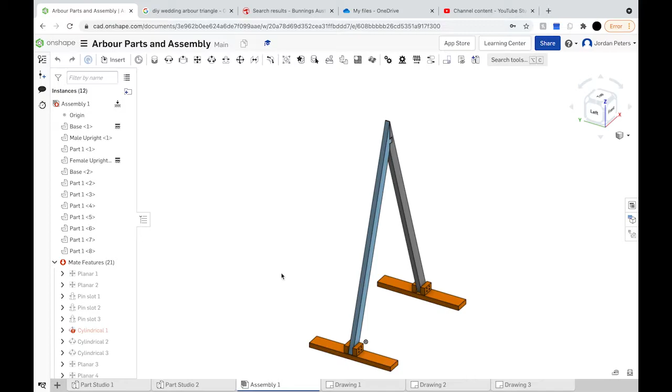Hi everyone. So this time around we're going to be looking at doing an assembly of our parts that we made in the previous video, and we'll also be looking at doing technical drawings of the assembly and the parts as well. So those can be seen in these tabs here. We'll wait for them to load.

But yeah, these are really industry standard skills that you'll need to learn how to do if you're at all interested in the industry or anything related as such. It's a really good skill to learn. I've recently used it to design a floor layout for a kind of living area. And it's really helpful, not just the drawing, but the assembly and the part studio, because it allows you to visualize things that you would otherwise have to kind of guess. And you can get really accurate dimensions and everything like that, that you just otherwise wouldn't be able to get with purely your imagination.

And sometimes drawing can be a bit misleading, while when you're getting parts and you're giving them dimensions and putting them in rooms that you've measured and things like that, it becomes really quite apparent where things sit and how far away things sit from other things. And yeah, same thing with any object. Really good to be able to model things on here. Great for 3D printing, all kinds of things. Great skill to be able to have just in general.

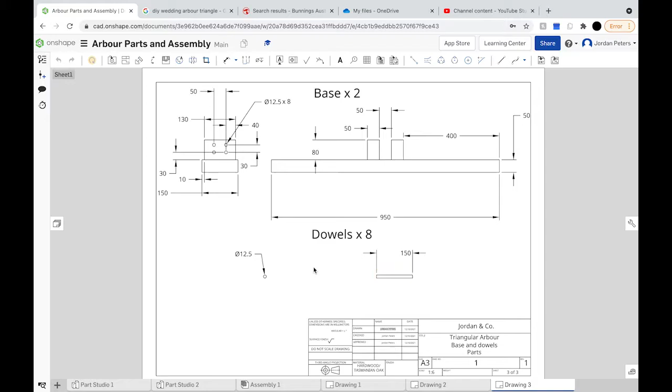Alright, so now we'll do an assembly. So we've got all our parts in our part studio, and you'll always have this default blank template that pops up, usually called Assembly 1, and that's where we'll do our assembly. So go to our front view, use the insert tool, and straight away we'll just put our base in, and then we'll right click on that one or double click in the middle of yours like mine, and we'll fix that. That's going to be our reference point for everything. And then we'll put our male upright in. Click, and click tick on that.

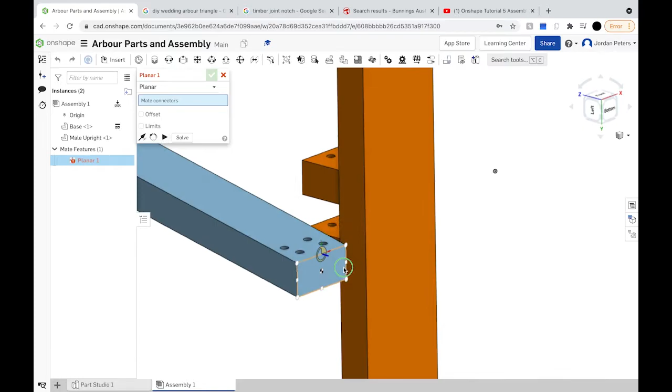And we'll do our planar mate first. So if you just come around here, select, we'll go to planar mate. So when you select a particular face, see this little bullseye thing with the green and red line and also a blue line attached to it. You're going to want that to be in the center of whatever face or hole that you're selecting to face up. So you don't want it on the corners or the edges here, we want it in the center. So that there, and then we're going to come around here and select the same thing on the other side. Alright, I'll get a better view. So that's up against there now. Alright, so tick that.

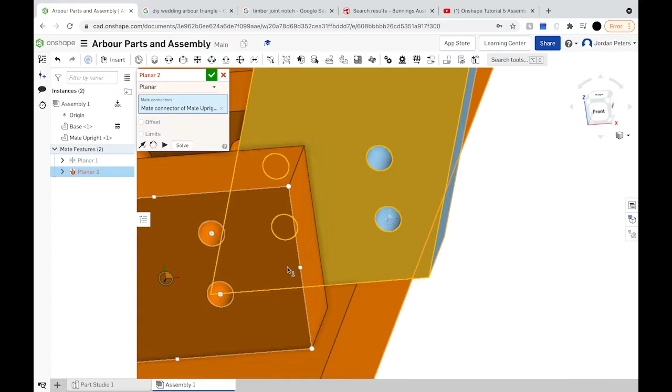And now there should still be a degree of freedom. If we grab this object, we can still move it along that axis. It's always going to remain in line with that plane. As you can see, it's just sliding in and out. But we still need to constrain it further. So we're going to zoom right in to this hole. I'm going to select that bullseye, make sure it's at the front of the hole, which that one is. Left click, and then we're going to face it up to that hole there. Alright. And then tick.

Now we'll see if you press play here, it should animate the degree of freedom. So I've pressed play and it doesn't have any degree of freedom, and when I click it and try and drag it, so there is 1 degree of freedom somehow. Yeah, so it's in line, it's facing up against that side of the hole, it's in line with that mate.

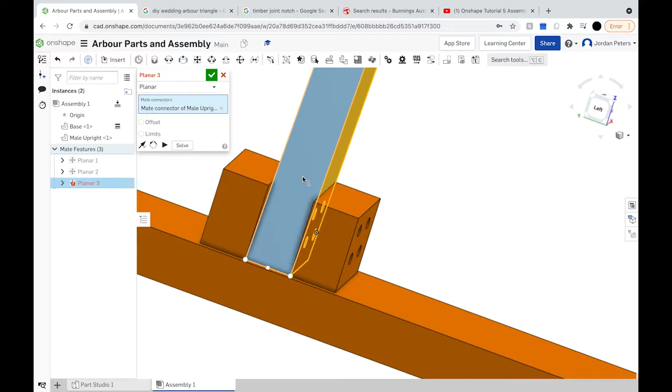We just need to constrain it so that it doesn't have the in and out kind of direction of freedom. It can't go side to side. As you can see, I'm trying to move it left to right, but it's only going in and out. So in order to restrain that further, I will use, I believe, a pin slot mate.

Let's try and do a planar mate on this edge. So selecting that there with the bullseye on the line, and then we're going to select that there with the bullseye on that line. And as you can see, it didn't really go in the right position, but I think it's just a bit glitchy when you match things up.

Where's my mic? Well, I hope you've been able to hear what I've been saying.

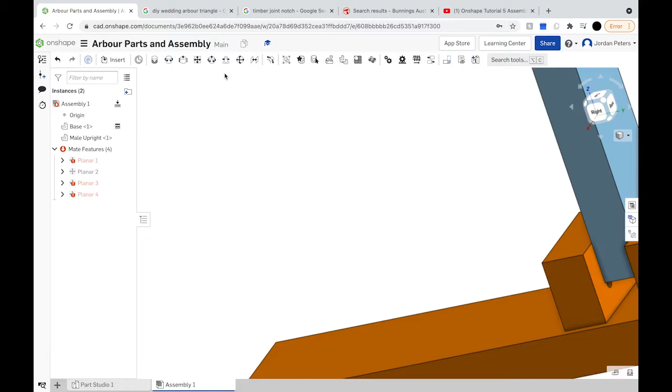But yeah, that should be alright if we press tick on that. And then also we're going to need to bring that face down to our... Oh, that might have stuffed things around actually, so I might Control Z that one. Let's try the pin slot then.

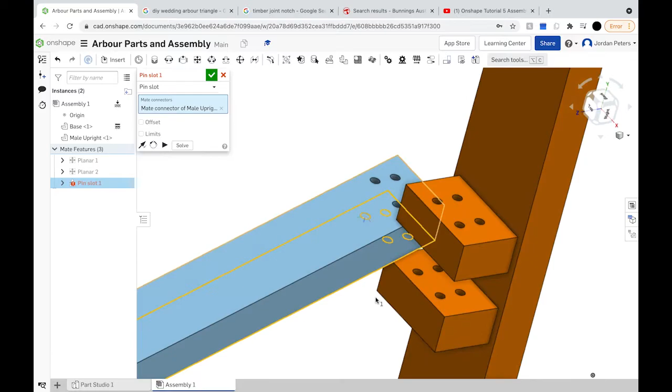Pin slot. Select the bullseye. And select that bullseye and then tick. Still has that degree of freedom. Go back. Pin slot. Select that one. Tick. Let's see what the new degree of freedom is. Still just those bits.

Then we'll go this one. And then select that one. And tick. See if it's still there. I expect it's still going to be there. So just going back to our part studio, see how things kind of matched up here.

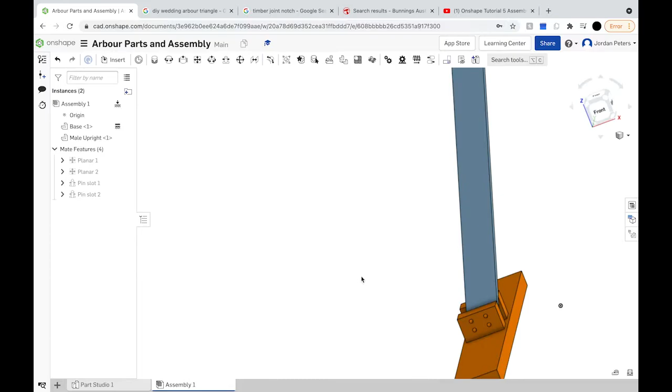Might have to create a little dowel that goes through in our part studio. I'll do that now, just quickly. So we know that the thickness of that is 150 altogether. So I'll just make a new part actually. Create part studio. So just gonna really quickly create a circle, and it was 12.5 millimeters diameter.

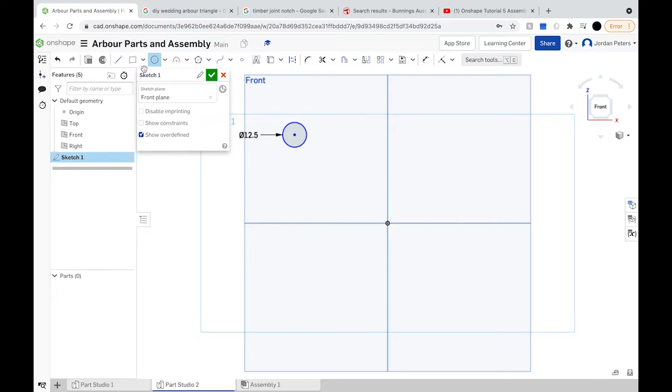And okay, extrude it, 150, sorry. And cool. Alright, that's our new part. Right, we'll try and use that as our restraining vector. So we'll insert new part, part studio 2, and there it is. Tick that, and go over to it.

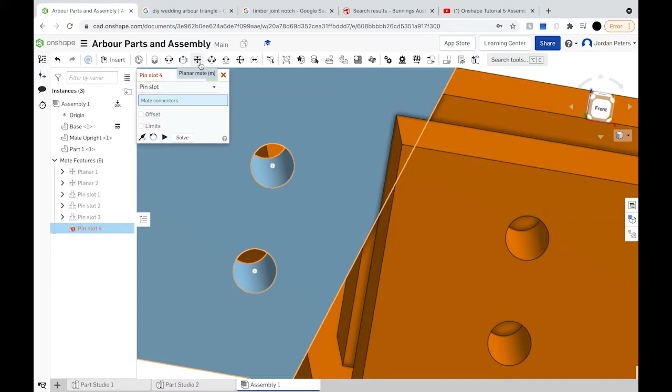Now, I'm going to go with pin slot. Go to that face, and that face there, and click OK. Now, let's see if that still has that degree of freedom. So it does. We can do the same thing. Perhaps a cylindrical mate will be better in this situation. Yeah. And then okay. Oh, still has that degree of freedom.

Like that cylinder. That there. That's solve. And then we're going to do the same thing for this hole and this hole. Solve. Okay, now that should do it. Sorry about that. There we go. No degree of freedom. Lovely. So we'll just do one for now, and we'll do the other parts.

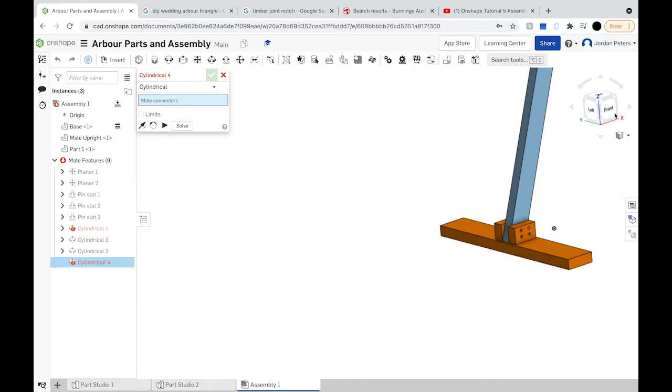Okay, now we can click X on that. We'll see what the remaining degree of freedom is with that particular part. No degree of freedom there. No degree of freedom there. No degree of freedom there. Say it has a rotational degree of freedom. Let's go to 0 degrees. 90 degrees. That's fine. It can rotate. It's not an issue for us. But yeah, we know our degrees of freedom now.

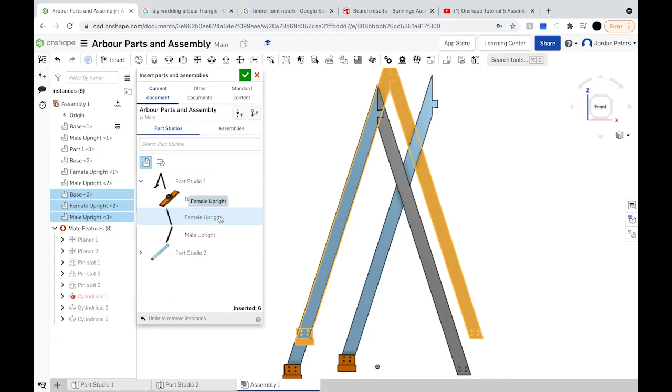Alright, now we'll insert our female part from this part studio. Oh. Go into, just Control Z those two parts. Female. There we go. Alright, now you can tick on that. Now we use our planar mate.

And we'll go that there. So we won't go that there. We'll go, X that one. We'll go this one here and here. That there. So bullseye's on that middle of that face. And then we'll go to that face there. And tick that. Now it should still have a degree of freedom to it. That's alright.

Let's try this corner. That corner. And solve. Now let's see if we have a degree of freedom there. Yeah, I still have that degree of freedom.

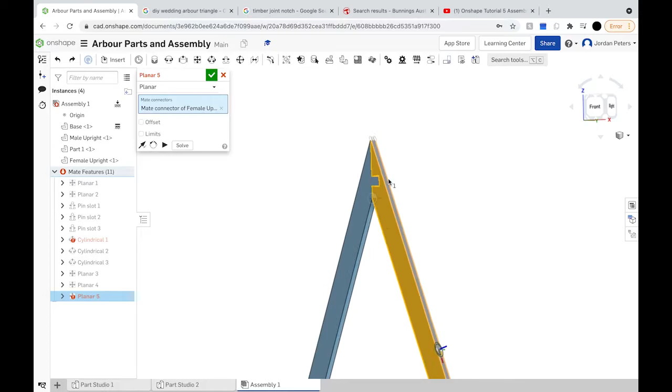Might just have to fix it there because we know it's perfectly kind of up against that part. Go right and zoom right in. Yeah, it's in line and everything. So I might just have to fix it where it is. Not really sure how to get around it. So okay, left click on that object and click fix. So now it doesn't have a degree of freedom.

Alright, now we're going to do the same thing with this one on that side. So insert, down arrow instead of clicking on the whole thing, and a new base. Planar mate that part. Zoom right in, make sure you're grabbing the right one. And then that face there. And then tick. And then we'll move this bit out. And we'll use our pin slot to insert.

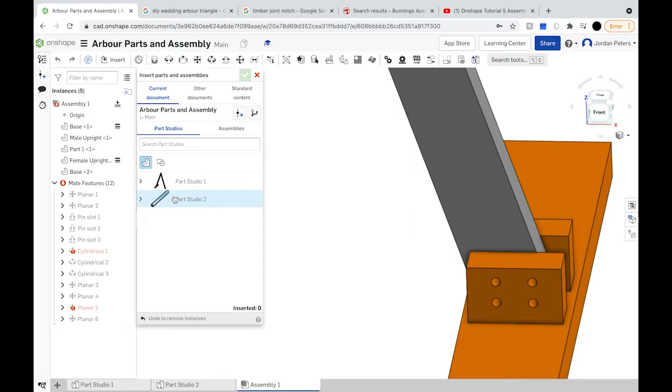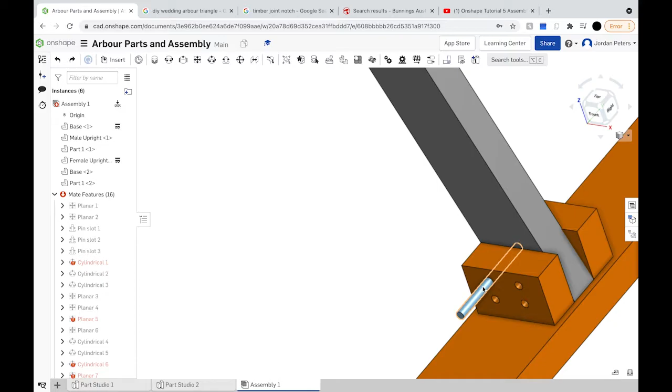We will use our cylindrical mate on that. Okay. And then the same thing for the other hole. Make sure we get the right one. Okay. And just putting that face as a planar mate up against that face. Solve that. Oh, didn't quite work. I think we've centered it accidentally. So wrong face we used. Alright, now cylindrical mate up against that face there. Solve. Lovely. Alright, now we can see what our degree of freedom is. Anything.

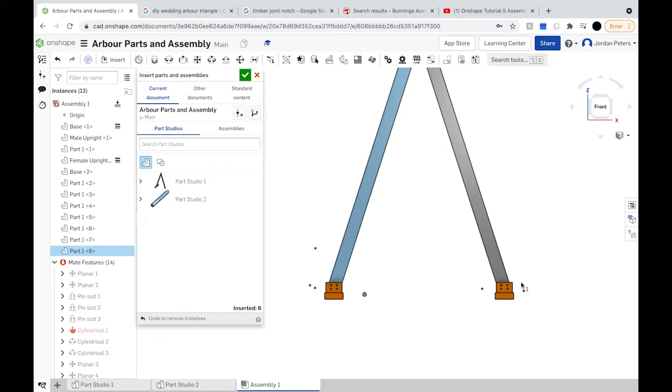Alright, so that's our assembly done. Cool. We could probably put some more of the rods in. We'll just do that. I might just leave it. It's not really necessary unless I was to put this into a drawing, which I will actually. Alright, we'll go through and do that. Go through the effort. Insert. We want another 6 of those rods. So 1, 2, 3, 1, 2, 3. Alright, tick. And I'll go through.

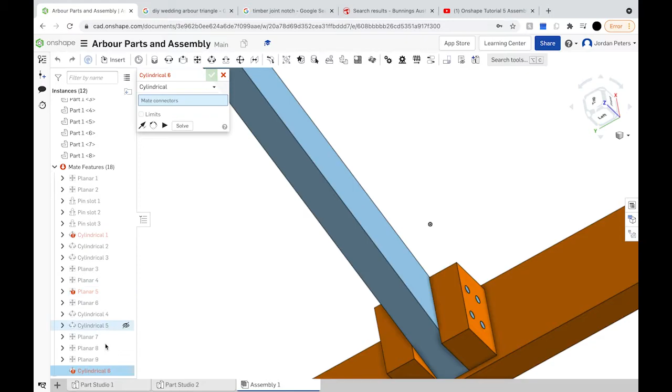Go planar mate. Select 2 holes, tick. Planar mate, hole, tick. Planar mate, hole, tick. Hide our male upright. Oh, what happened there? Yep. And select our cylindrical mate. Oh, wrong one. And hide our male. Select our cylinder. That, and then show our male and hide our base. And select that face. And tick. And then show our base again. And then repeat that process, but as long as it's in there, it's not really necessary.

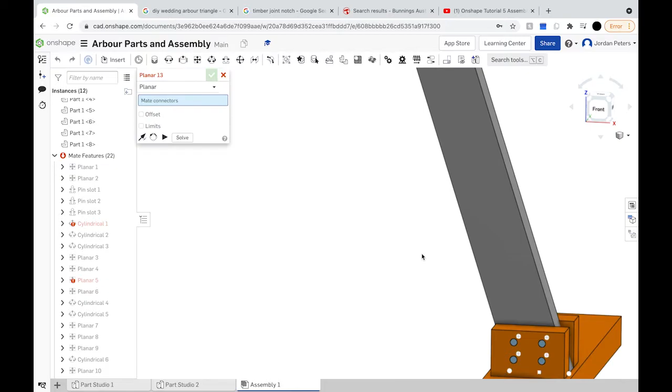So planar mate, that, solve, that, good, and that, done. Alright, now we have our whole assembly done. Okay, the next thing we can do is put it all in a drawing. So click out of that, show that, and we'll make it a drawing. And there's default ones in here. I think the one I just choose at the moment is ANSI B millimeters, or I may have opened one. No. So have I recently opened one? No, it's still on public.

So an A3, go Onshape maybe. Alright, A3, go ISO, try this one. Okay. And we can put our assembly in. Scale can be 1 to 30, 1 to 20. 1 to 20, there we go. We'll do a front view. Side view. And an isometric. And I'll just move these around down here.

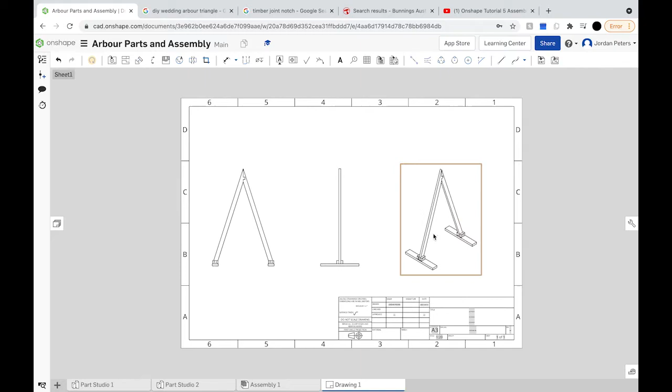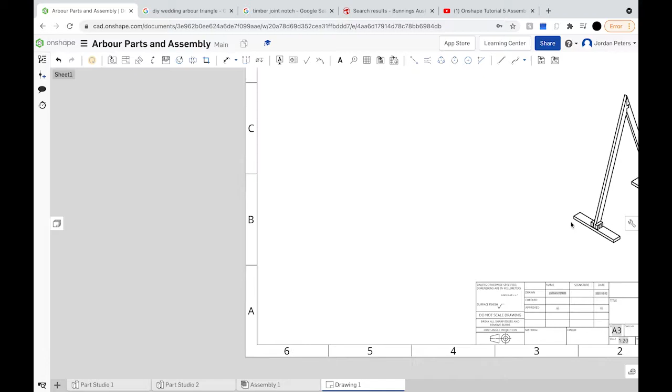And we'll put in some critical dimensions. Almost want it a bit bigger, don't we? Try change our scale to 10. A bit too big. 1 to 15 maybe. 16. Get out of that. Select our previous ones. Might have to delete the initials. Alright. So view 1 to 16 is what we're going with. Front view. So assembly 1. A front view. Side view. And an isometric.

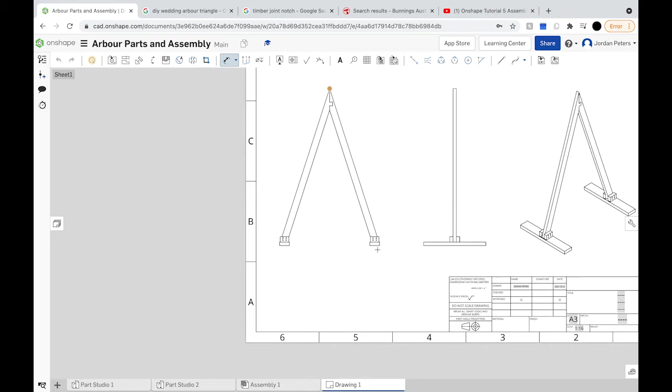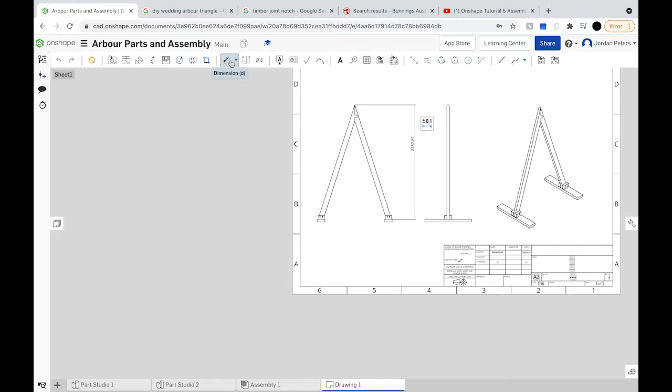Alright, now let's put in some critical dimensions. There we go. From here, so left click on the top point to the bottom corner. And now we want that to be a different type. Maybe I have to go back on that one. I was more thinking of a different dimension. Go that top bit. This bit here. It's the same. Trying to get this dimension here, which is probably all I need to do is this, isn't it? There we go. It's not a round number, but that's okay.

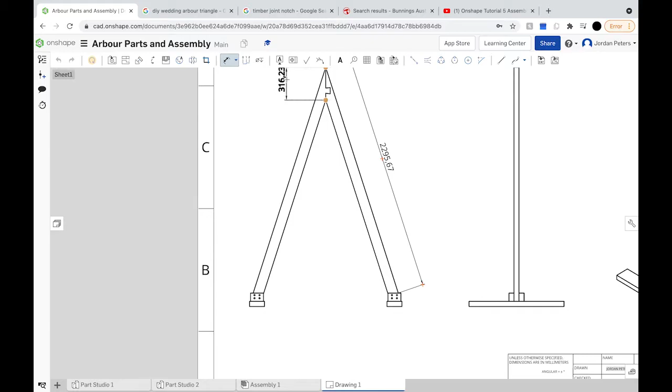This part. There's a few non-round numbers, is there? 16. 60. And then 50. And then that dimension there. And that dimension there. Put it. And that means we'll just have to move a few of the dimensions out. Move that one further. Move that one so it's in line with that one. Move that one so the 60's on this side, further out as well, and move the 200 so it's in line. And it's on the other side. There we go. And then this can come out further as well.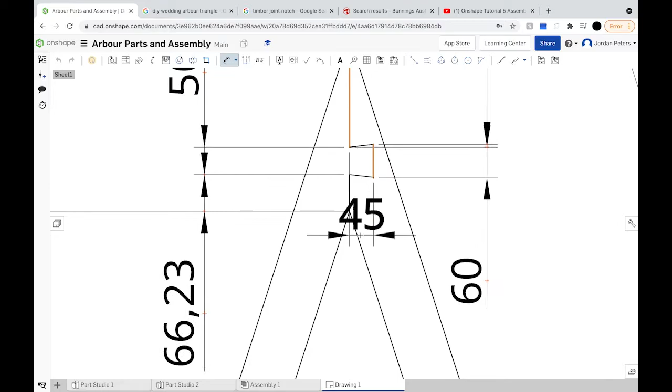Okay, so we've got some critical dimensions up here. Probably need to know that dimension there. Between those two. Lovely. 45. Can bring that out further. And then they can choose whatever angles they want. That's fine. So the critical dimensions are there for that part. We're going to have to do some on the blocks. We'll do these circles.

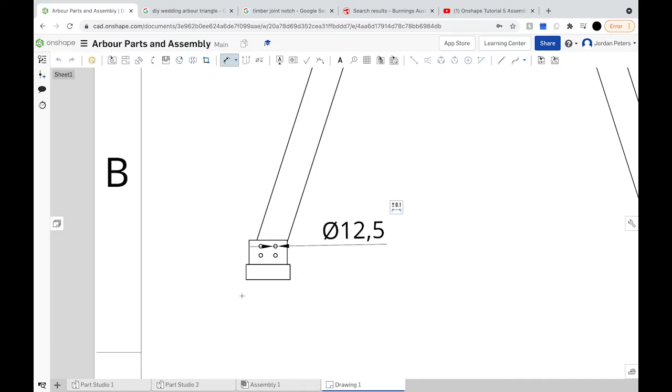There we go. 12.5. And then, when you have multiple of the same hole, you want to write times the amount of holes that you have. So we have 8 holes, so we're going to go to our note feature, and we're going to write times 8. And that's it. Simple. And we can get out of that feature now.

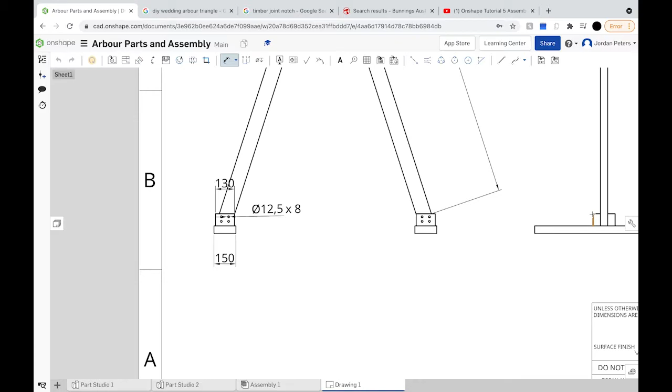We've got to put the dimension in for this bottom dimension. For the side. Oh, actually, no, we don't need to do the side height. What else do we need to do? This dimension here. And that one takes control of the height dimension of both of those.

Oh, distance in from the side. That and that. So when you do distance from a side, you left click on the face and then you left click and shift on the next face that you want to do the distance between. I don't know if I made myself clear before on that. Yeah, so 10 mil, go 10 mil either side just for good measure. 10 mil.

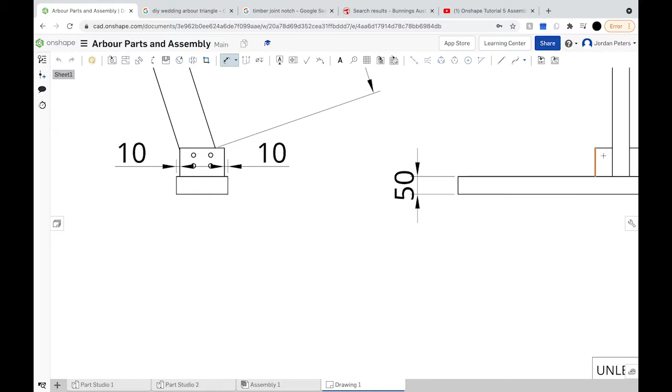And then in terms of positioning for where this sits in relation to the stand, that will all be worked out when we do the individual part dimensioning, which is good. Alright, so now let's do height dimensions on here. 50, 80, 50. And length dimension 950.

Dimension between here and here, 50. And then the dimension between here and the bottom, the top and the bottom. It's an important dimension. Again, not exact numbers, which isn't ideal, but that's what happens when you're dealing with angles and things like that. That should be all the critical dimensions for that part.

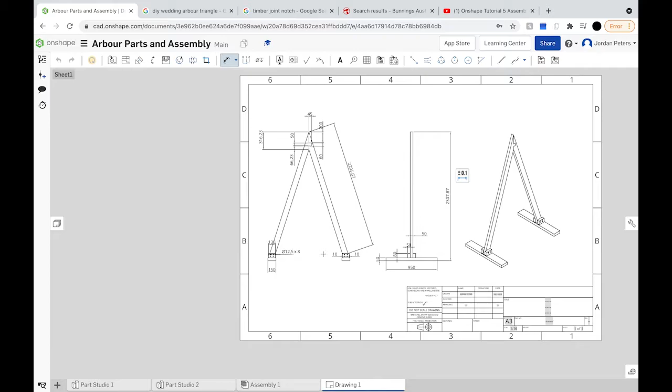Is it all clear in here? And that's probably better off over there actually, because the line, it's deceptive. It looks like it's from that joint, but it's really from this point here, which is where the 50 is. So we'll bring that over here. And we'll bring him further out. It should be alright like that. Yeah.

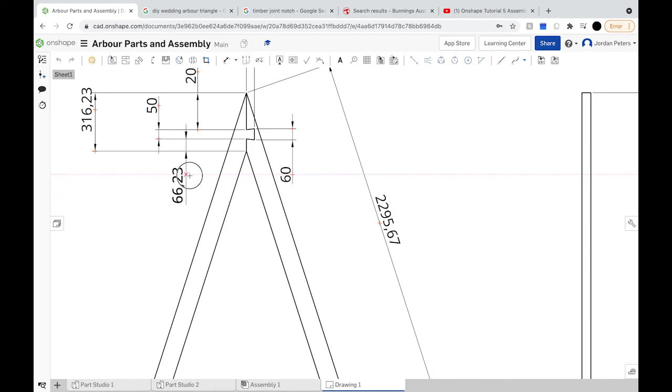Right, looks good. Right, now we'll fill in this table here. It automatically does the date, automatically puts your account name in. You can also just change it if you need, just double click on it. Checked, usually by the person you're submitting it to. You can send drafts off to whoever in industry. You send it to your boss or the client, and then approved by typically your boss.

But we'll just write Jordan Peters once again. And then you usually print it out and do signatures, handwritten and everything like that. Otherwise you can do it digitally. And then the date at which your boss or the client checked it. We'll just do today. Pretend we send it off all in one day. What's the date today? The 12th.

12th of the 10th, isn't it? October of 2021. Oh. Bit of a different convention for the date. /2021. That's how we do dates. 12/10/2021. Enter. Material. Let's write hardwood on that. It's a variety of materials. Finish unknown, up to the person.

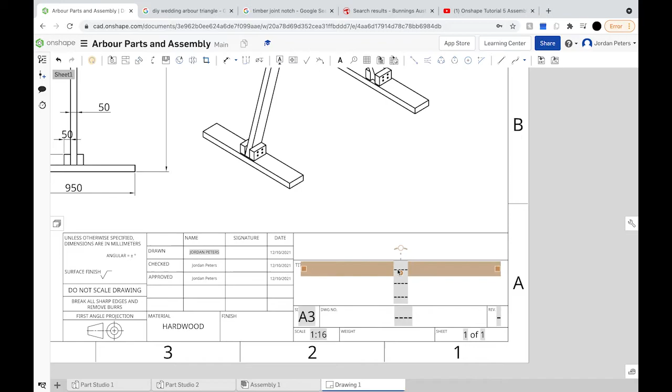Then you write your title. I'm going to write Triangular Arbour. And usually you write whatever course or maybe the particular company that you work for in this top section, or maybe it's part of a larger set of drawings. And you usually put that in the top section there. So this is drawing number 1, revision 1.

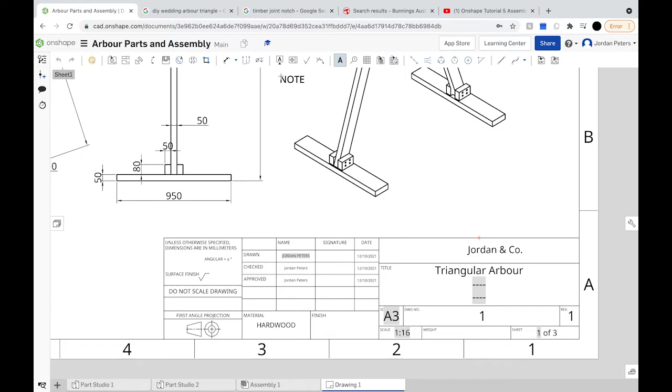And sheet 1 of 2, maybe even 3. We'll do 3. And weight, scale, size all done for you. Don't need this, that's for metal. Surface finish. This one I'm going to write Jordan and Co. That's my company that I work for. Put that there.

Then with these weird quadrant things, I like to delete them out. Oh, you can select this prior and do it properly the first time, but I'm just going to delete those out. I just like a clean border. We select multiple.

Nearly done. Alright, I believe that's done. I can delete those extra lines out.

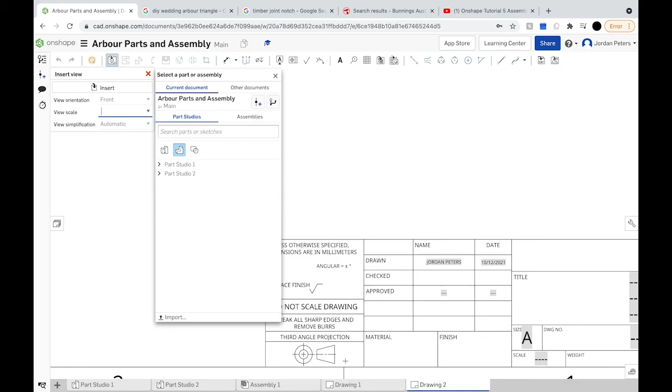So we're going to try and use the same scale, ideally, so 1 to 16. There we go, that looks like it's the same. And I believe we only need that kind of front view, that should be enough. Now insert view, Part Studio 1, get the female in there as well, and we'll do it over here. Alright.

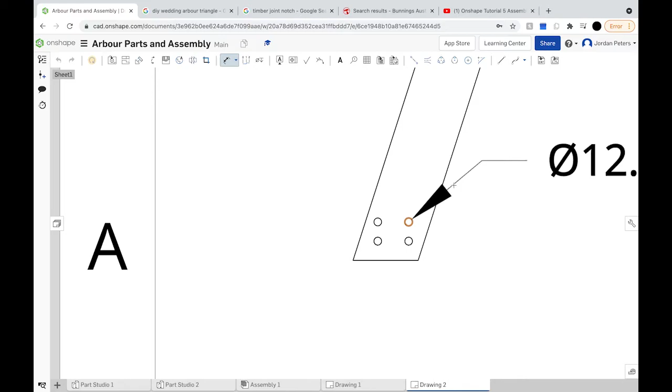Let's work on these dimensioning. Go through. Now, because the parts are obviously separate, we're just going to write times 4 on this one, because they're not technically connected like they were in the assembly. So we're just going to go times 4 for that particular part and click out.

Now here's where it gets interesting. We're going to dimension how far things are away from each other and from the corner here. So that's the center of this is 40 mil from the center of that across. Left click on the middle dot, hold shift and left click there, and it says 40. Pull that across, then left click the middle and then left click the whole edge, and that's our 30mm dimension. We'll pull that out further probably. There you go.

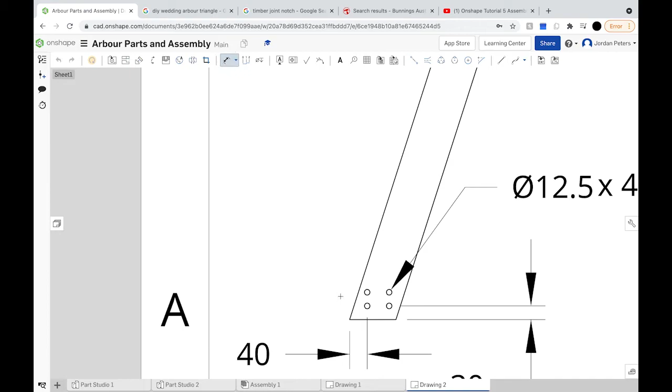Back to our dimensioning tool, and then between the two dots is another 30. And then between these two top ones is 50, so holding shift, trying to find that second dot. I don't know what's going on. There we go, 50. All right, so that should be all the critical dimensions we need: 40 across, 30 up, 30 up, 50 across, 30 down, 30 down. We know all that.

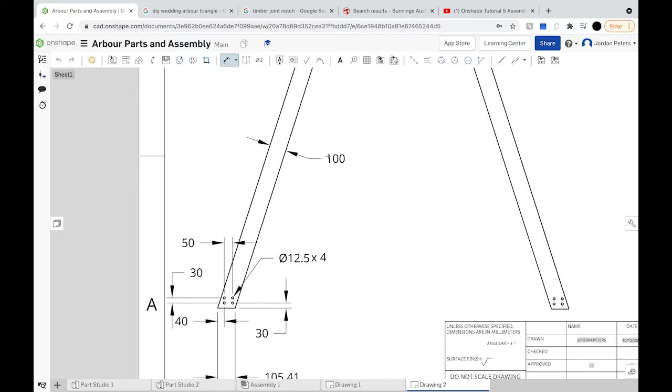Cool, and now we want to dimension this bottom bit, 105.41. And we will dimension the thickness, holding shift. And then we've got to dimension this whole length - see, that's the number I was looking for before that wasn't coming up. Might want to move it a bit further in. I'll do the same on that one.

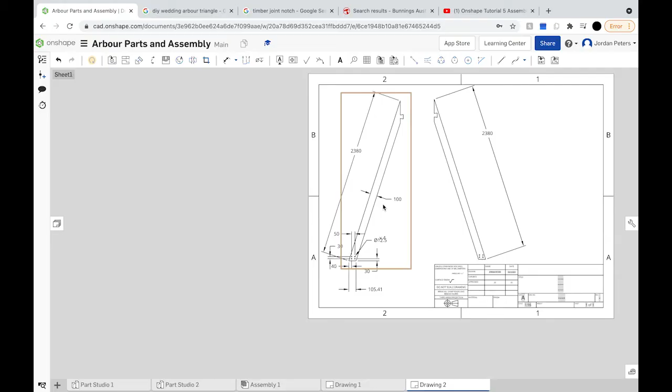So I might go back to the last drawing and delete that dimension out because it's misleading. So delete that, there we go, it's obviously to a different point. Alright, so we also probably want to get this inside dimension - this will be probably an odd number. Yeah. There's a lot of crossing over of lines here, which is not ideal, but can't really help it in this situation.

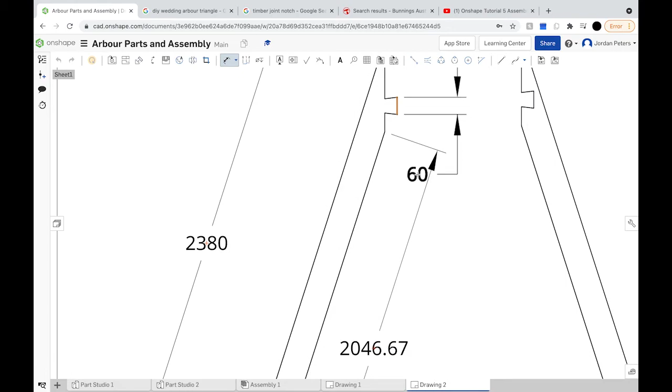Okay, now I can work on these dimensions here. 60 - I kind of already did this in the other one. Put it up the top maybe. 60 between those two points. 50. 200. And then 66. 2, 3 - in other words, whatever's left essentially. There we go.

Then the distance between there and there. All right, that looks like it's all good. I can do the same on this. Right.

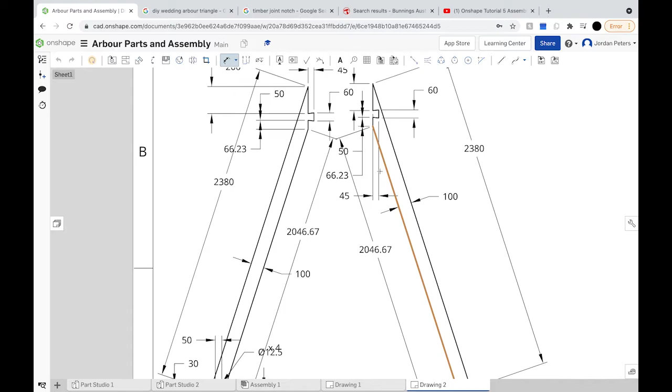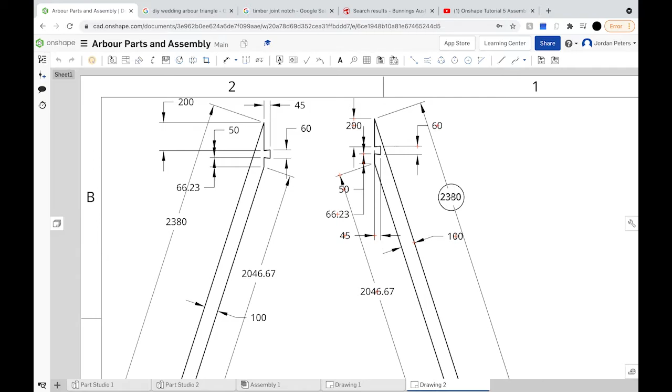Okay, now probably need to move these a bit further away from each other, and a bit further up as well. Alright, that's better. Okay.

Same thing over here, dimension all of those points. Oh, that's the wrong one - it's going to be the outside one.

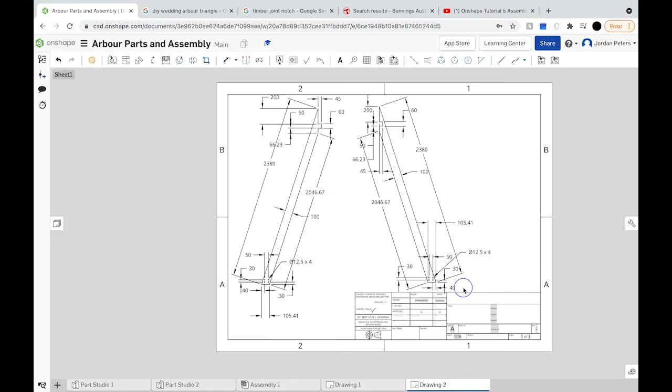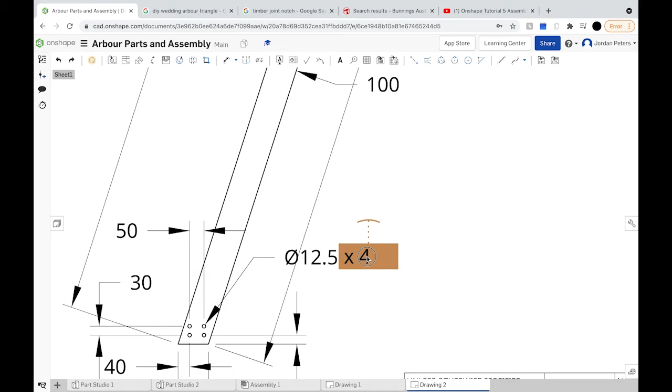There we go, looks pretty good. Might want to move or center all of it - we'll move it all in one big go, and grab the notes as well this time. Alright, looks good. Delete out those sections, there's a lot of dimensions going on.

Alright, so I'll change the date to 12/10/2021, and I'll leave - we'll do it just to solidify it - Jordan Peters. Jordan Peters, delete that out. And 12 - wait, what? Yeah, it's the 12th, /2021, 12/10. That seems to have corrected itself. There you go.

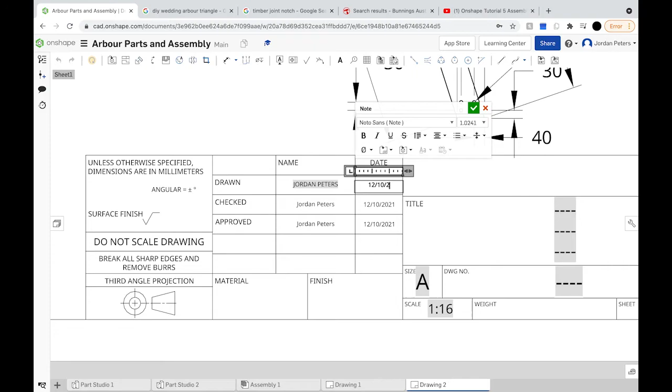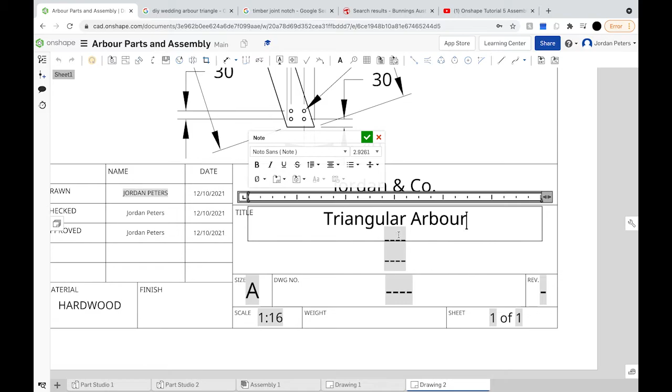Material is hardwood. Remove that. Jordan and Co. And it is the Arbour Triangular. Oh, alright, Triangular Arbour. And then specifically it is the upright male and female parts. And then drawing number one, revision 1, and sheet 1 of 1. The scale's there, size A3. Then that's about it, I think.

Good, alright, now one more drawing.

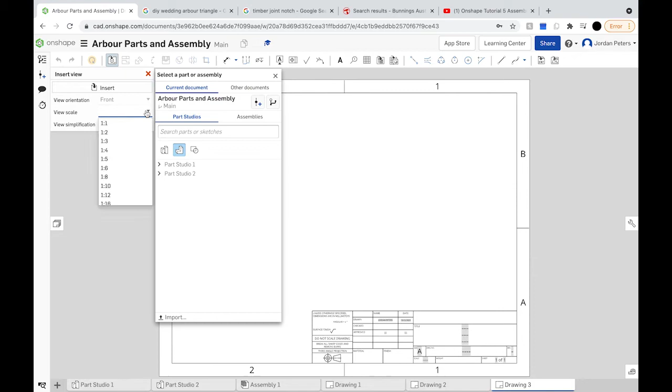It's a fairly simple part. Select our scale, go to our part studio, and we'll put our base in. Now, first view will be a front view, then a side view, maybe a top view. Front view and a side view should suffice. And then we'll set our rod as well.

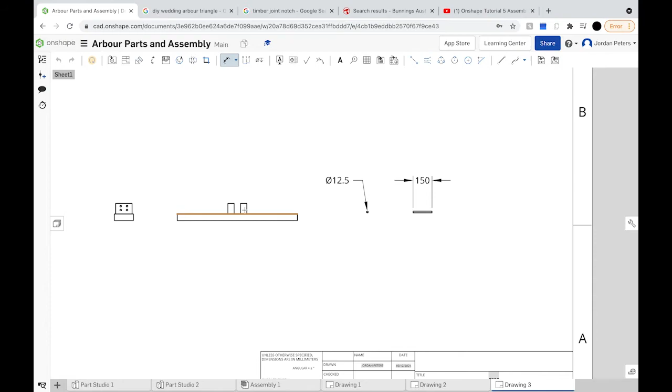Let's dimension these. 12.5mm rod, and the length is 150. That's really all the dimensions you need. Now this one is 950 long.

The distance between this part and this part is 50. And the distance of the part is 50. And what else can we do here without doing too much? I think that's all we need to do.

Well, I might do that dimension there, 50. Oh yes, and that dimension between there and there being 400, that's an important dimension. 400. So 150, and then make up the difference.

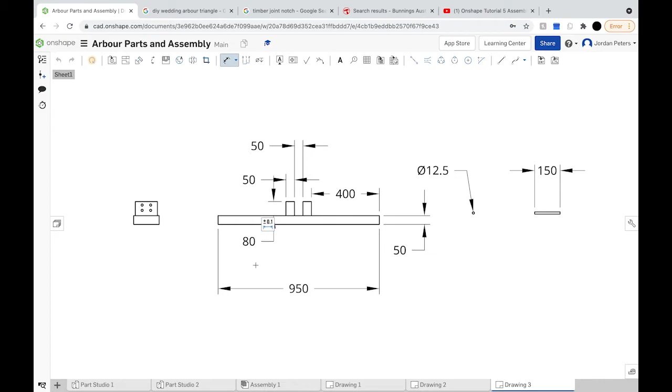Go that dimension there, 80. And yeah, then we can do a few more things on here. So...

12.5mm hole. I'm going to times that by 4 later. I'm going to times that by 8 actually. Bring that out, this dimension here.

130, got our height dimension there. Need this width dimension, 150. And we need that shoulder dimension, so holding shift, 10mm.

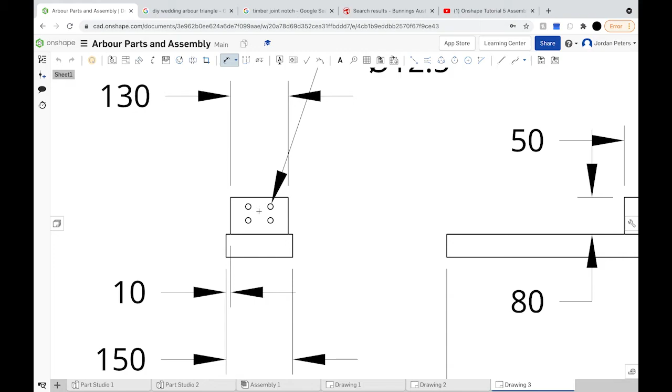Yeah, and then we'll obviously need to do our distancing and everything between points. So 30mm between that point there. And then 40mm between that and the side point.

Bring it up here. And then 30mm between the two center lines of the holes. And then last but not least, 50mm between these two center lines.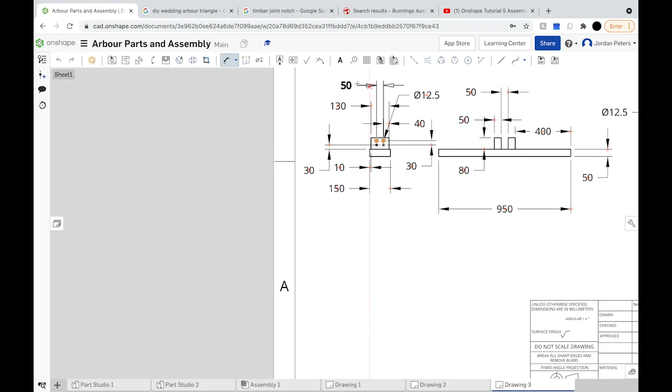Lovely. Might want to change the scale on this one actually. It's good to keep the scale consistent, but maybe we need to change it. Let me change it from here.

No, we don't want to do it like that. We select all of this, change scale. I need to look it up again. 1, 2, 2.

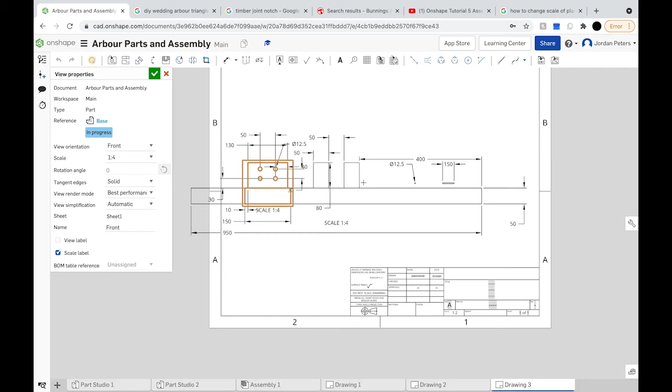I need to move this one now. It's nearly the size of the whole thing. Maybe you might reduce that actually, so otherwise it won't fit. Yeah, 1 to 6.

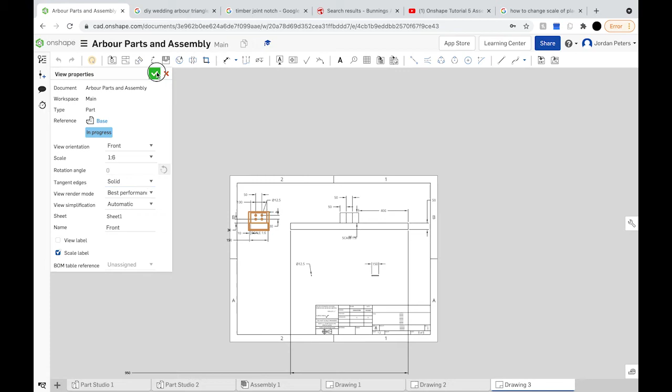I'll put this fella down here. And well, it looks like it's changed one but not the other. View properties, 1 to 6. There we go, alright, now we can move that a bit closer.

Move this guy in. Move this one way down here up. Don't need that scale button, we can just write it down there when we get a chance. Alright, now, is that everything's still in its necessary place? Move that out further.

Looks good. Move that up higher. And do a note here: times 8, both sides.

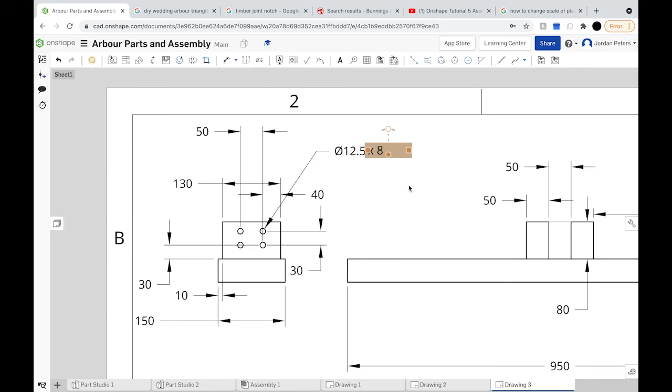That needs to be, yeah, like that. Change the scale of these ones too. Properties, change them to 1:6. Okay.

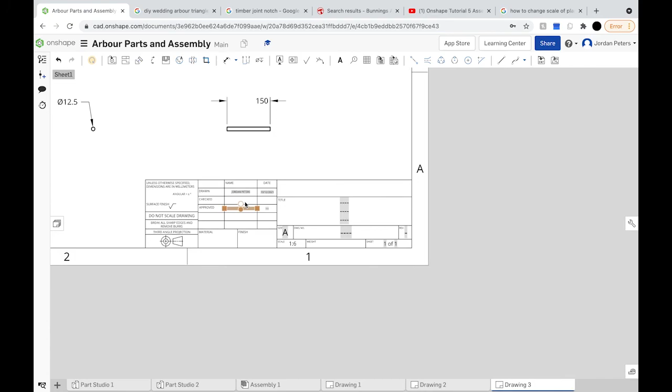Alright, now we can focus on this part of it, so 1:6, alright. That's just good to know that you don't always have to commit to something that you've done previously in the drawing. You can always kind of change things later. Ideally you always get it right the first time, but sometimes it doesn't always work like that.

Alright, we're nearly done now. And draw, delete that. Hardwood / Tasmanian oak. The dowel joint is Tasmanian oak.

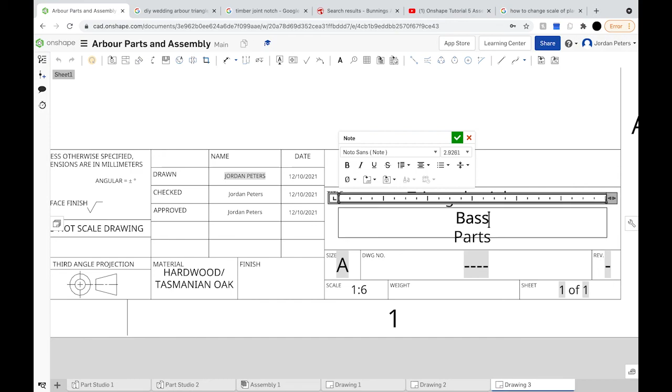Title is, what do we call it? Our Triangular Arbour. Parts: base. Base and dowel.

Tick, number 1. Revision 1. And this is 3 of 3. And then we'll write our note up here: Jordan and Co. Dot.

It's actually pretty centered, there we go. Alright, then delete our little quadrant things out. Make that an A3.

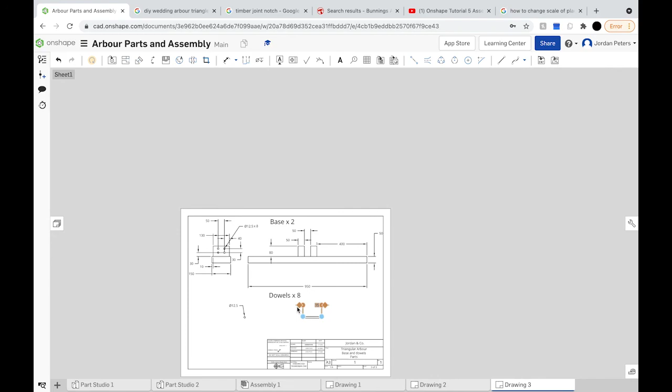Alright, and I believe we're done. So that is start to finish the process of building, drawing in Part Studio, then doing an assembly, and then doing technical drawings of your assembly and parts. So I hope you enjoyed the process, and we'll see you next time. Alright.